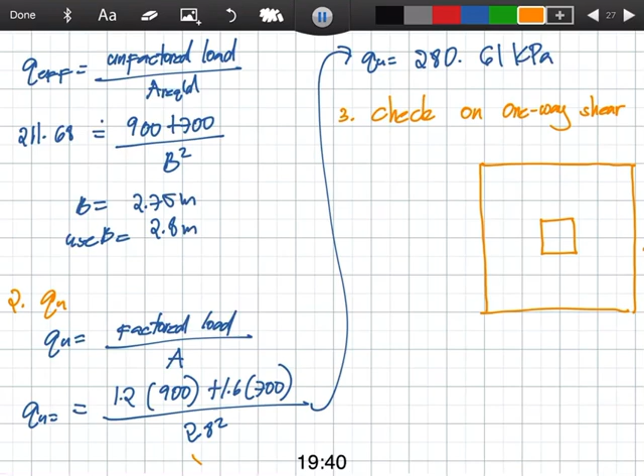Ang ating critical section ay itong section na to. And saang located yung section na yan? Located yan, d distance from the face of the column. So, assignment nyo kung saan yun hahanapin sa NSCP, class. d distance from the face of the column kapag one-way shear. So, section in NSCP, that is your assignment. So, etong section na to, yung kulay red na yan, yung critical section natin sa one-way shear.

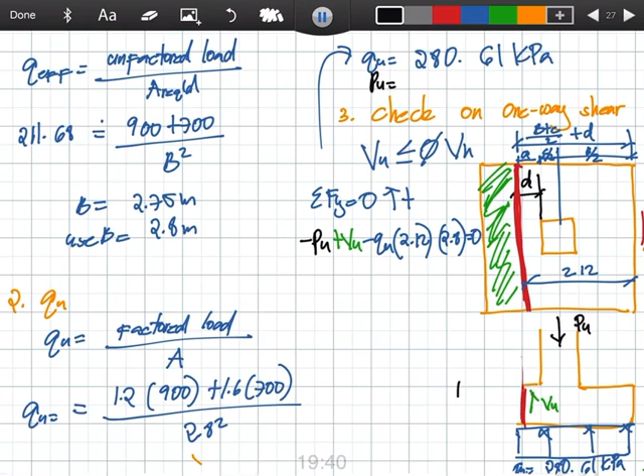Positive sign pala yung QU kasi pataas. Plus QU. Ano yung QU natin? 280.61 times 2.12 by 2.8. That's that. 1655.7 is equal to 0. Okay, so we will have our VU na ano na? Minus 2,200. 534.3 kilonewton.

Tapos, para ma-check natin sa one-way shear, i-compare daw natin siya sa ating VN. So, ano yung VN natin? Class, nominal shear is equal to strength ng concrete plus strength of a secondary reinforcement. Class, in footing we do not put reinforcement for shear. So, ang magre-resist lang ng shear sa footing ay concrete lang. So, yung secondary reinforcement pala is stirrups, ties, ganun. So, walang stirrup or ties dito sa ating footing. So, secondary reinforcement is 0. So, Vn is equal to Vc. At ang general formula ng Vc sa ating NSCP is 0.17 lambda square root of f'c bw d. Okay, so hanapin nyo din kung anong section yan sa NSCP.

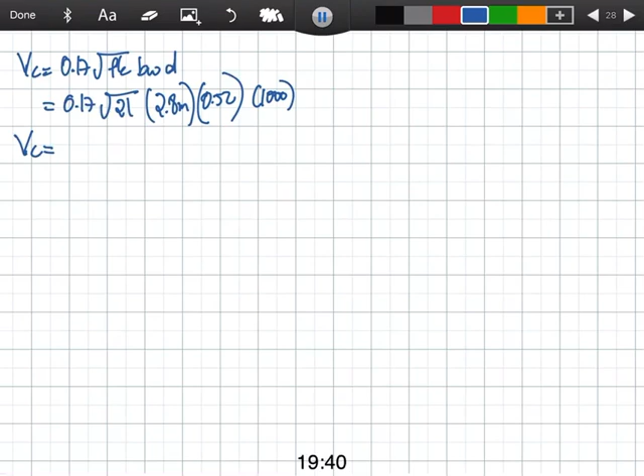Times 1,000. Dapat kasi times 1,000 to. It is 1,134.3 kilonewton. Compare natin. VU must be less than or at least equal to phi Vn. Ano ang phi natin pag shear class? Dapat tinatanong ko sa inyo to sa klase eh. Sige, kunin natin phi Vn. Phi Vn is 0.75 Vc plus Vs. Kaso Vs is 0, so 0.75 of Vc. So, ano ang phi Vn?

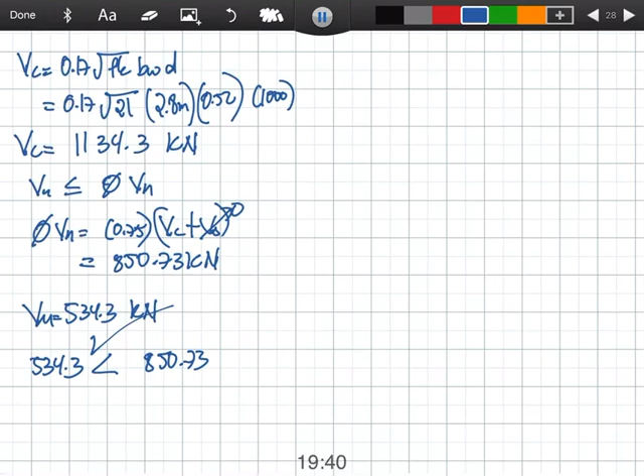0.75 of 1134.3. That is 850.73 kilonewton. Ano yung VU na na-compute natin kanina? 534.3 kilonewton. Okay, so compare. Is 850.73 greater than 534.3? Yes. So, check tayo sa one-way shear. Ibig sabihin ba, kapag check tayo sa one-way shear, safe na yung area natin? Hindi pa. Meron pa tayong tinatawag na two-way shear.

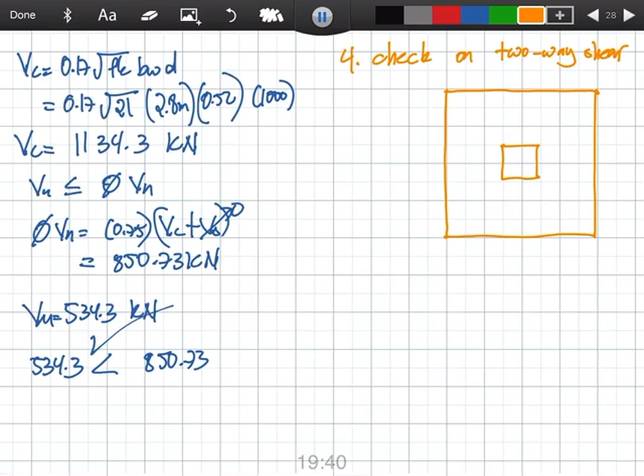So, check on two-way shear naman tayo. Two-way shear, it is also called punching shear. Okay. So, saan na ako? Drawing ako ulit ng square footing. Asan naman ang critical section niya? Sasabihin ko na siya, hindi na kailangan hanapin sa NSCP. It is d over 2 distance from the face of the column on all sides. So, ito ang kanyang critical section.

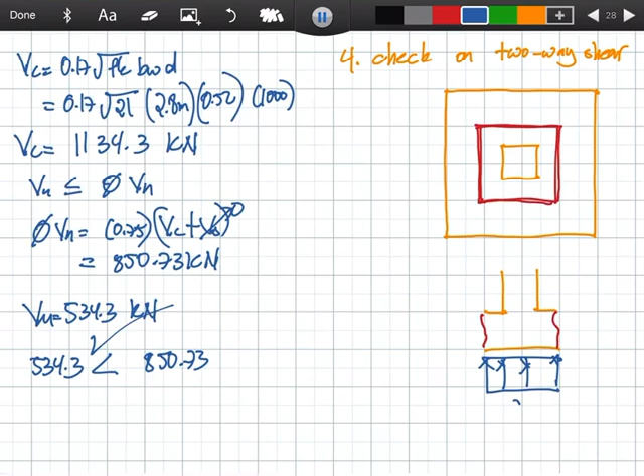Kung ipro-project natin yan, ang itsura niya ay ganito. Tapos, QU na lang ay ito. Since it is d over 2 distance from the face of the column on all sides, meaning ito ay C plus d. At ito naman, dahil square yung column natin, C plus d din yan. So, the same rules, class, for checking ng two-way shear, phi Vn must be greater than or at least equal to VU. Check na naman natin. This is our PU and this is our VU. So, how are we going to solve for our VU?

Summation of forces Y equals 0, positive going up. So, negative PU plus VU plus QU times the area. Class, ganito ang mangyayari dyan. Pagdating ng load dito, kung kulang yung thickness ng ating footing, magcra-crack dito sa sides na to. Parang mapapunch siya, mahihiwalay ito mula sa rest of the footing. So, ang maiiwan lang ay ito. Kaya yung QU natin, subject lang dito.

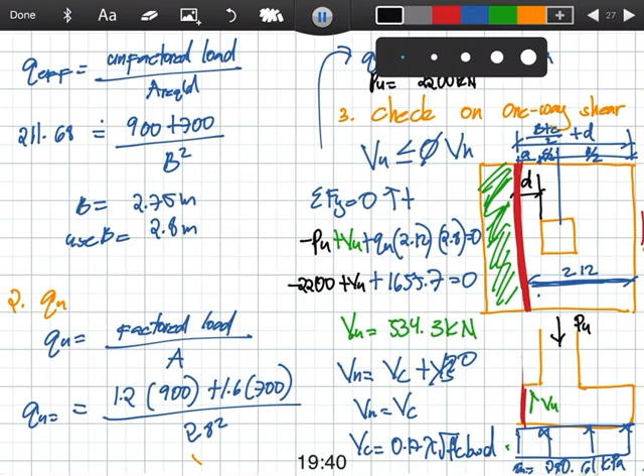So, QU times, ano yung area? C plus d squared equals 0. Ano yung PU natin kanina? Negative 2,200 plus VU plus QU. Ano yung QU ulit natin? I forget ulit. 280.61. C is 0.4 plus d is 0.52, squared. Okay, so calculator na to.

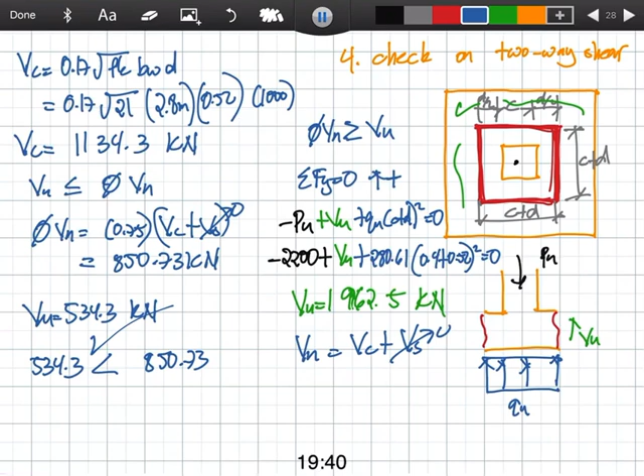Negative 2,200 plus 280.61 times 0.4 plus 0.52 squared. Ang VU natin ay 1962.5 kilonewton. Positive pala, sorry. VU is 1962.5 kN. Ngayon, check na naman natin siya sa ating Vn. Vn is equal to Vc plus Vs. Walang secondary reinforcement, walang stirrups at ties. So, ang Vc naman natin dito, class, pag ganito ay 3 according sa ating NSCP. So, meron.